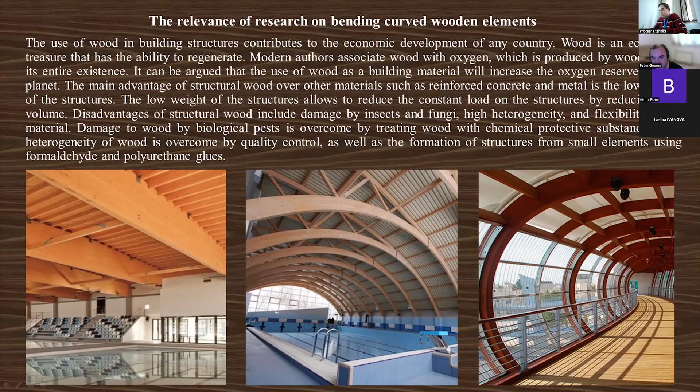Slide 2 shows the tension and compression strain diagram for wood and the stress-deformed state of a typical wood beam. The high flexibility of wooden elements is associated with a small modulus of elasticity of wood, MOE, as well as rheological properties, creep and relaxation. To reduce the influence of rheological properties on the wood elements, as well as reduce the flexibility of wood structures, it is possible to use reinforcement of the structure with high stiffness characteristics.

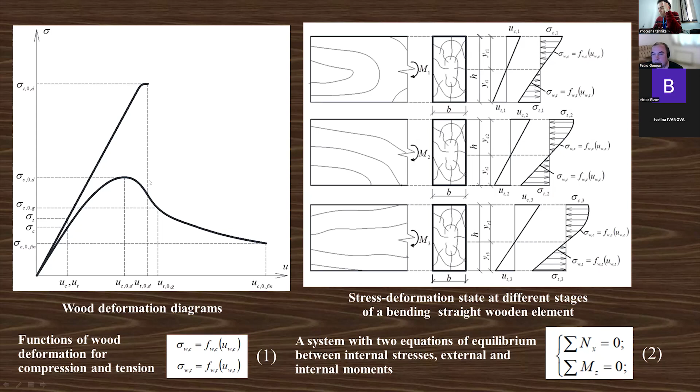On slide 3, you can see a comparison of the deformation diagrams: wood, metal fittings, carbon fiber reinforcement, basalt fiber reinforcement, glass fiber reinforcement. Metal reinforcement and carbon reinforcement are the best reinforcement. These materials have a high modulus of elasticity.

Therefore, the main task of our work was to develop a basis for calculation and modeling the work of structures reinforced with metal and carbon rods or tapes. At the same time, the basis for the calculation should take into account the elastic-plastic model of wood deformation and the features of the deformation of reinforcement materials.

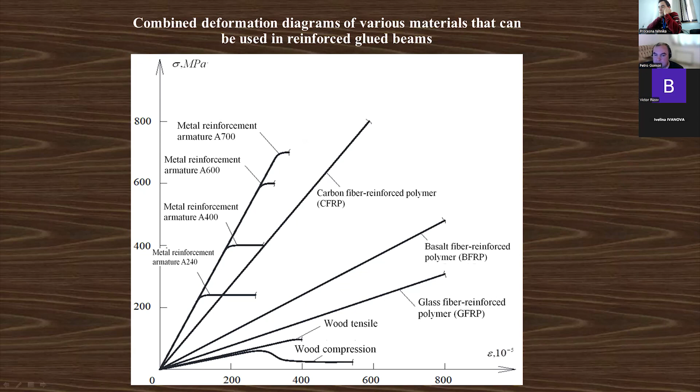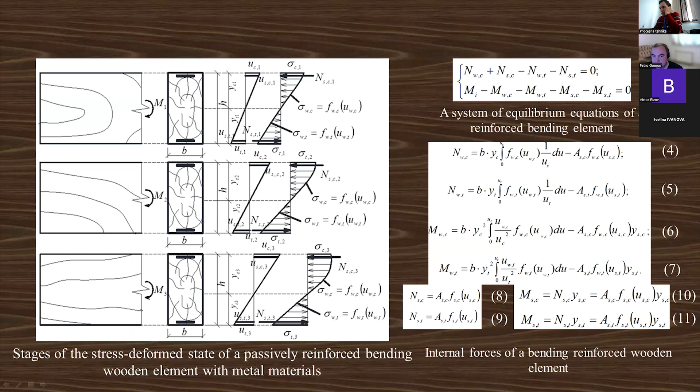Slide 4 shows the stress-deformed state of a reinforced wooden beam. The slide describes all the necessary equations for determining the stress-strain state of the cross section, or stress-deformed state. We provide the basis for calculating the stress-deformed state, which includes images of the structure under different types of loading. The first case is shown on slide 5.

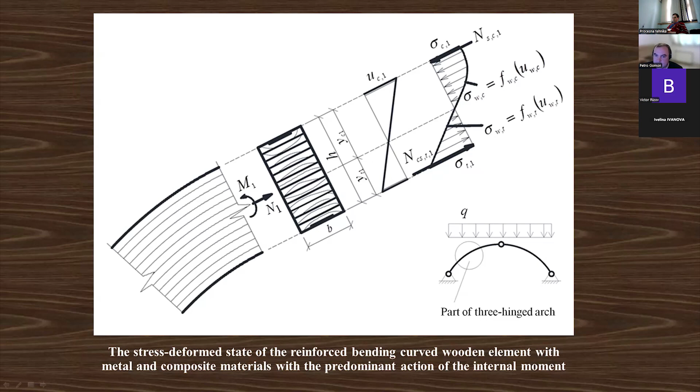In this case, the stress-deformed state of the reinforced bent curved wooden element has a predominant action of the internal moment. In this case, tensile and compression zones appear in the cross section. In the second case, slide 6, we have a predominant compressive force. In that case, the entire cross section is compressed. The first and second cases we can often see in structural elements in which bending with compression occurs. Such elements include arches, curved beams, columns, to which force is applied with eccentricity.

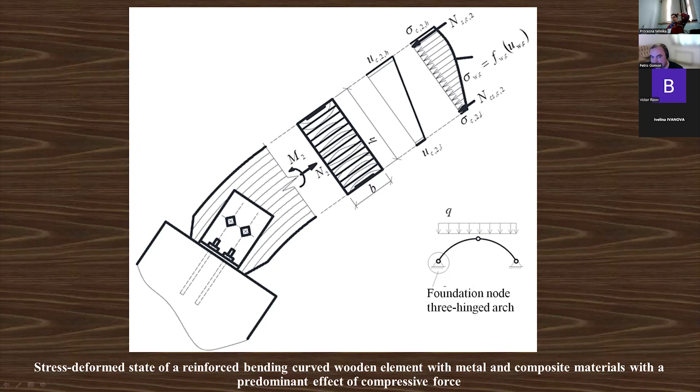The third and fourth cases are related to the occurrence of tension in the cross-section. Slide 7 shows the stress-deformed state of the cantilever hanging part of a curved beam cover construction, like stadium bleachers. In this case, the entire cross-section is in tension. There is a case in which there is a predominant moment; the cross-section in that case will be compressed and tensioned. Stretching can only occur for hinged and cantilever cases. Such cases of structure occur very rarely.

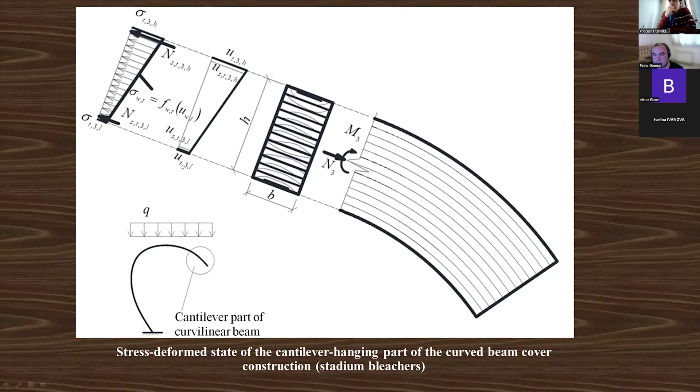The tension and compression diagrams of wood are completely different, and the use of materials for reinforcement also has its own characteristics. It is possible to reinforce the stretched and compressed zones with metal fittings. However, reinforcement with fiber-reinforced composite is possible in the tension zone.

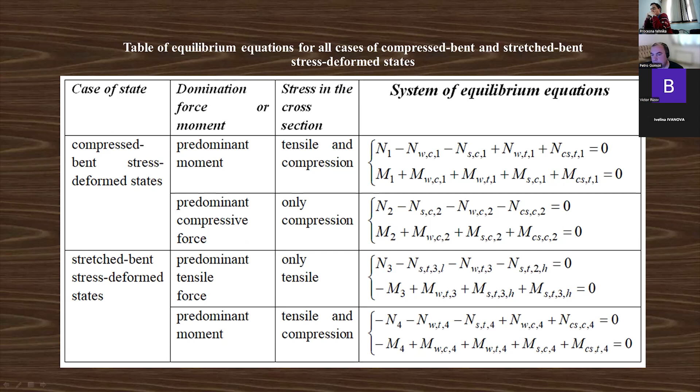And the conclusion of our report. Main conclusion: the determination of the stress-deformed state of wood, which is a part of the deformation method, is proposed. The deformation method can be used for theoretical and numerical modeling and calculation of bending wooden elements with and without composite reinforcement. The methodology is part of the theoretical foundation for modeling the work of elastic-plastic elements.

Modern standards allow determining only the limit state of the structure; taking into account the stress-deformed state of the bending element will allow predicting the work of wood during its manufacture, operation, and failure. The deformation method allows expanding the understanding of the work of wooden elements, thereby increasing their cost effectiveness and reliability. This concludes our report.